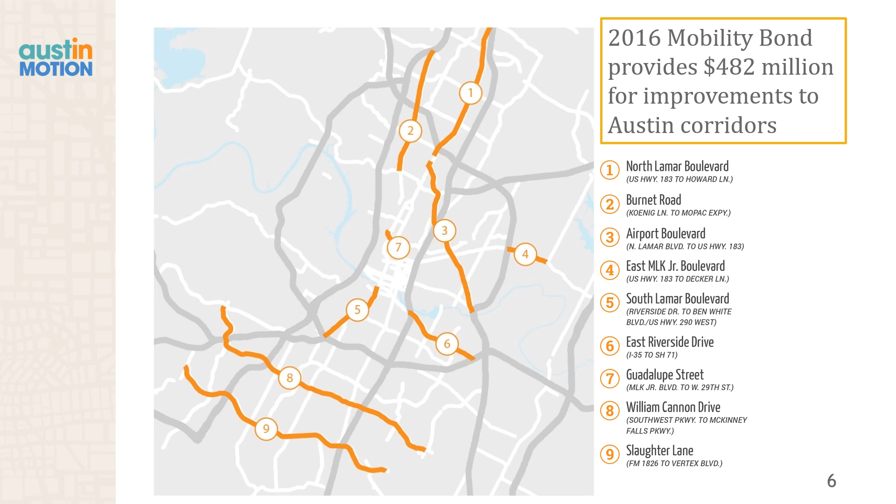To provide some background, in 2016, Austin voters passed the 2016 Mobility Bond, which provides $720 million for transportation improvements throughout the City of Austin. As part of the Corridor Mobility Program, $482 million of the bond funds are being used to design and construct multimodal improvements on 9 major roadways. South Lamar Boulevard between Riverside Drive and US 290 is one of the 9 major roadways identified in the Corridor Construction Program, which is funded through the 2016 Mobility Bond and is part of the Corridor Mobility Program.

The City of Austin completed a Corridor Mobility Plan for South Lamar Boulevard in April 2016. The plan outlines the recommendations for improving mobility and safety along the corridor. In addition, South Lamar Boulevard is a part of the recently approved Capital Metro Project Connect System Plan and the locally preferred alternative. The City of Austin conducted environmental studies to understand the potential impacts of the proposed improvements for the South Lamar Boulevard corridor.

These studies were conducted in accordance with the National Environmental Policy Act, or NEPA, as well as per state requirements outlined in Title 43, Part 1 of the Texas Administrative Code, or TAC. The South Lamar Boulevard corridor is owned by TxDOT. The City of Austin is pursuing environmental clearance for all the South Lamar Boulevard improvements between Riverside Drive and US 290 that are recommended in the Corridor Mobility Plan that was completed in April 2016.

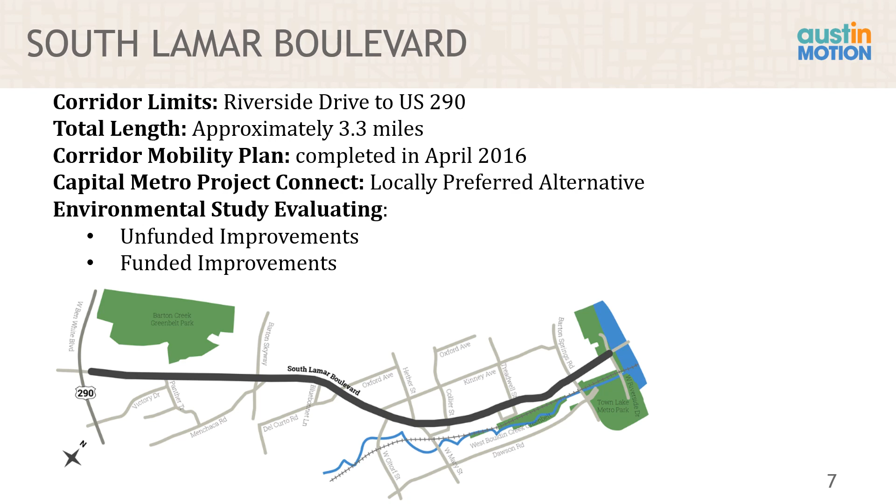This includes improvements that are not yet funded for construction, as well as those that have been funded by the 2016 Mobility Bond. Achieving environmental clearance for all improvements will enable the City of Austin to construct them when future funding sources are secured.

The goal of this project is to address safety and mobility concerns along the South Lamar Boulevard corridor. Over 40,000 vehicles travel this corridor each day. According to crash data collected by Austin Transportation, 2,173 crashes occurred on the South Lamar Boulevard corridor between 2015 and 2020. Those crashes resulted in 21 serious injuries, 283 non-incapacitating injuries, and 321 possible injuries. 53 of those crashes involved bicyclists and 46 involved pedestrians.

There are currently no bicycle facilities between Barton Springs Road and Riverside Drive. Bicycle facilities are on-street and unprotected on both sides of South Lamar from Barton Springs Road to US 290. The pedestrian facilities need reconstruction in several locations. Sidewalks either need repairs, are not connected, or do not meet ADA guidelines. In certain locations, sidewalks are inaccessible due to missing ramps, and in other locations, utility poles conflict with the sidewalk path. In many areas throughout the corridor, driveways are undefined or very wide, contributing to numerous points of potential conflict between vehicles and cyclists and pedestrians.

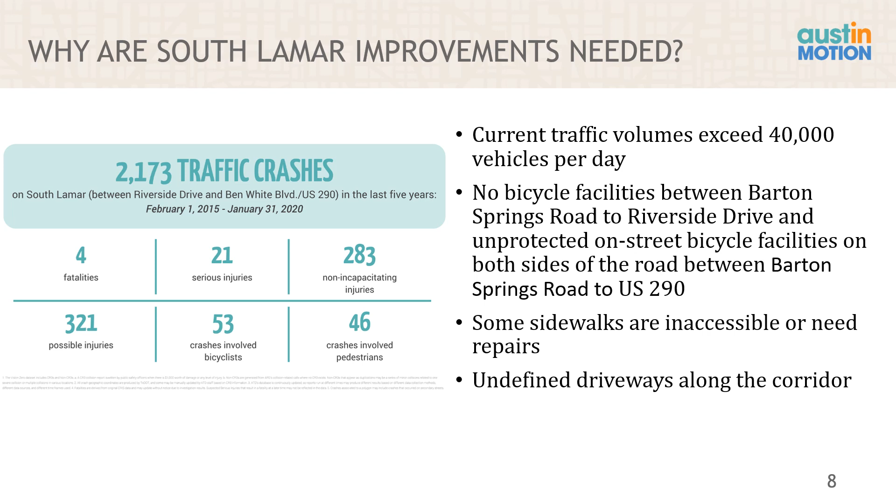This is a typical section for the existing configuration of South Lamar between Riverside Drive and Barton Springs Road. This segment currently consists of 6 travel lanes, 3 northbound and 3 southbound, separated by a raised median with openings for left turn movements.

There are existing sidewalks but no bicycle lanes. Other infrastructure includes an underground stormwater drainage system.

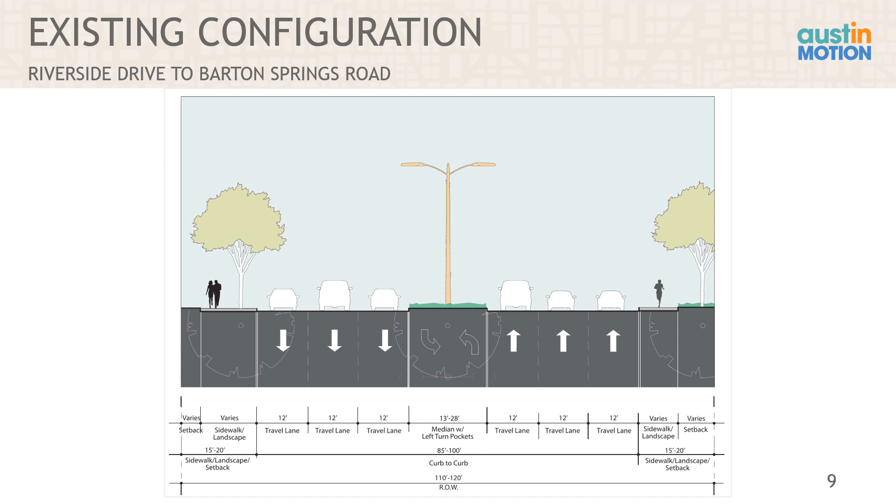The funded improvements between Riverside Drive and Barton Springs Road represent the City of Austin's ultimate vision for urban corridors. Improvements include upgraded traffic signals at Riverside Drive, Toomey Road, and Barton Springs Road, pavement rehabilitation, and relocation of the

existing curbs towards the center of the road by removing the existing right turn lanes, two-way bicycle lanes, and continuous ADA-compliant sidewalks behind the curb on both sides of South Lamar Boulevard, access management improvements such as driveway modifications and

reconstruction of the center medians, drainage improvements, bus stop improvements in partnership with Capital Metro, and enhanced landscaping with a variety of plantings and tree species, street lighting, and streetscape improvements such as benches, bicycle racks, scooter parking, and waste receptacles.

Though it varies by section, the existing right-of-way width from Riverside Drive to Barton Springs Road is generally 120 feet and will not require additional right-of-way.

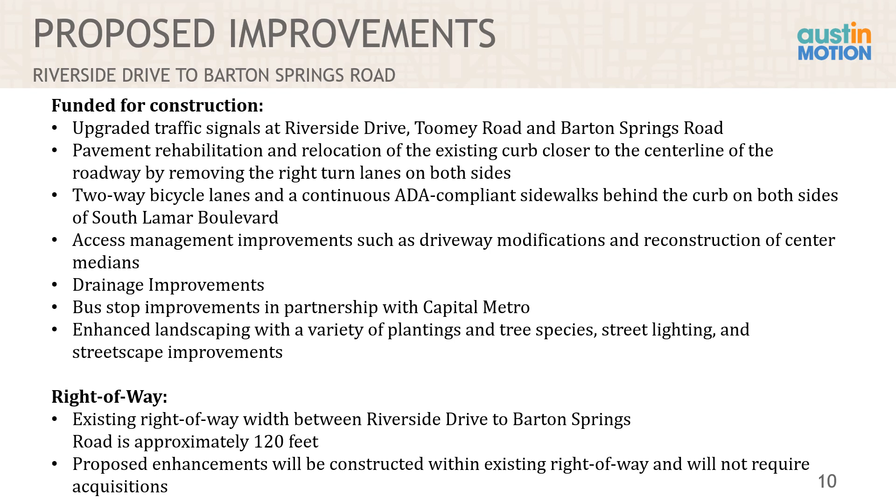This slide shows the proposed typical cross-section for South Lamar Boulevard between Riverside Drive and Barton Springs Road. These improvements reflect the ultimate vision for the South Lamar corridor and are funded for construction. The project will be constructed within the existing right-of-way.

Starting from the outside moving in, there will be 7-foot sidewalks where possible, 10-foot two-way bicycle lanes, and 7-foot landscape areas on both sides of the road. The landscape areas will separate cyclists and pedestrians from the travel lanes.

These elements will be accommodated within the existing right-of-way by repurposing the existing right turn lanes on both sides of South Lamar Boulevard.

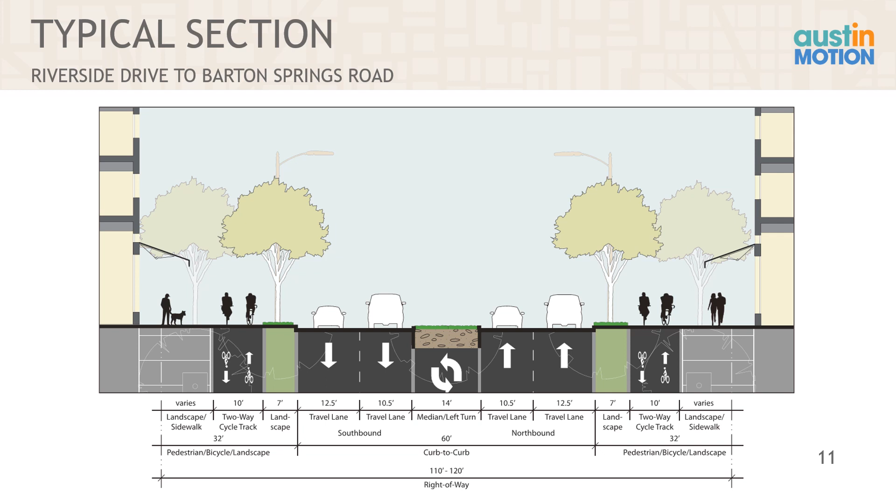Next is the typical section for the existing configuration between Barton Springs Road and US 290. This segment of South Lamar currently consists of 4 lanes, 2 northbound and 2 southbound, separated by a 2-way center running left turn lane.

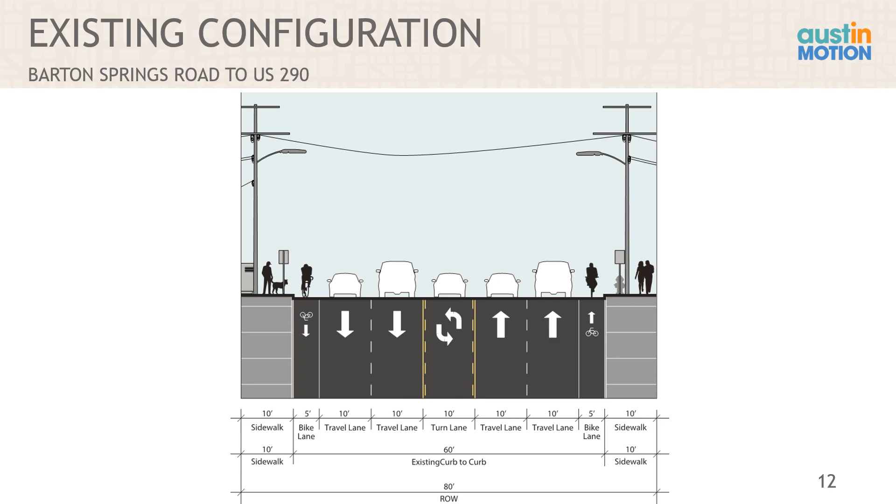Existing on-street bicycle lanes are on both sides of the road, as well as sidewalks. The existing drainage is generally an open ditch system south of Barton Skyway, and a closed stormwater drainage system north of Barton Skyway. There are also overhead utilities and poles that run along both sides of the road.

The funded South Lamar Boulevard improvements between Barton Springs Road and US 290 include improved traffic signals at existing signalized intersections with enhanced technology, 2 new traffic signals at Del Curto Road and Evergreen Avenue, 4 new pedestrian hybrid beacons, which are mid-block signalized crosswalks for pedestrians.

Safety and multimodal connectivity improvements at certain intersections, pavement rehabilitation and the relocation of existing curbs towards the center of the road, new shared use paths for pedestrians and cyclists on both sides of South Lamar.

Shared use paths will comply with ADA guidelines. Access management improvements such as intermittent raised medians along the corridor and driveway modifications.

Drainage improvements and bus stop improvements in partnership with Capital Metro, including a new dedicated transit priority lane northbound through the intersection at Barton Skyway and Menchaca Road.

The right-of-way width between Barton Springs Road and US 290 along South Lamar Boulevard varies by section, but is generally between 80 and 100 feet. The majority of the proposed improvements will be constructed within the existing right-of-way.

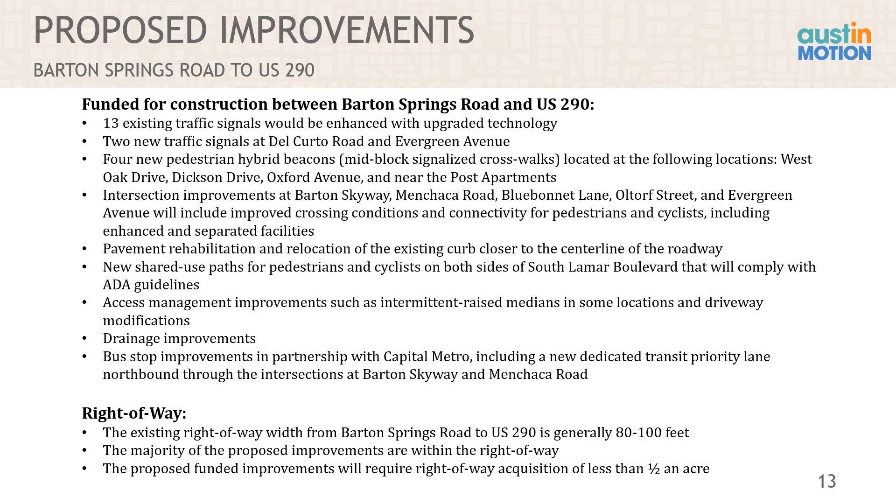The proposed funded improvements will require additional right-of-way of less than half an acre. These acquisitions are being analyzed during the design phase of the project.

This slide shows the proposed typical cross-section for South Lamar Boulevard between Barton Springs Road and US 290. These improvements are funded for construction. The project would largely be constructed within the existing right-of-way, starting from the outside moving in with 8-foot shared use paths

with 2 to 4 foot landscape buffer zones, separating cyclists and pedestrians from the travel lanes, would be on both sides of the road. It should be noted that the near-term funded improvements would require limited right-of-way, with needs generally restricted to areas at major intersections where turn lane modifications are proposed.

Relocation of the existing curbs closer to the center line of the road will accommodate the shared use paths and landscape buffers. The north and southbound travel lanes would remain, with intermittent median islands added along the corridor to define where the left turn should occur.

Landscape and streetscape will be added to the median islands.

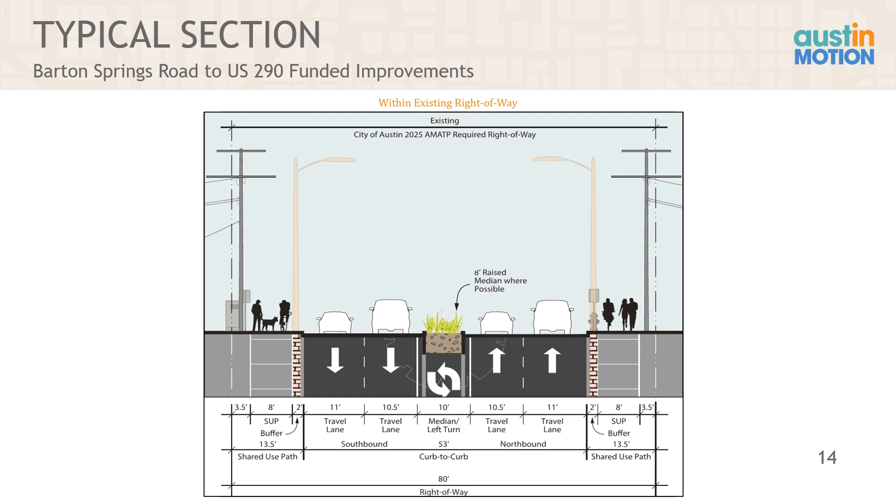In some places, elements from the unfunded vision are being implemented through private redevelopments. These include things like separate bike and pedestrian facilities and landscaping.

This slide shows the proposed typical cross-section for South Lamar Boulevard between Barton Springs Road and US 290, where elements from the unfunded vision are being implemented in some areas. Generally, this is possible where sufficient right-of-way is available at some intersections or through private redevelopments. Where possible, the City of Austin will construct improvements such as separate bike and pedestrian facilities and landscaping. The project would largely be constructed within the existing right-of-way.

Starting from the outside moving in on both sides of the road, there will be 6.5 to 10.5-foot sidewalks, 5 to 7-foot landscape area, 8-foot bicycle paths, and up to 2-foot buffer zones separating cyclists and pedestrians from the travel lanes.

Relocation of the existing curbs closer to the center line of the road will accommodate the pedestrian and bicycle facilities. The north and southbound travel lanes would remain, with intermittent medians added along the corridor to define where left turns should occur. Whether landscaping will be added to the medians will be determined prior to construction.

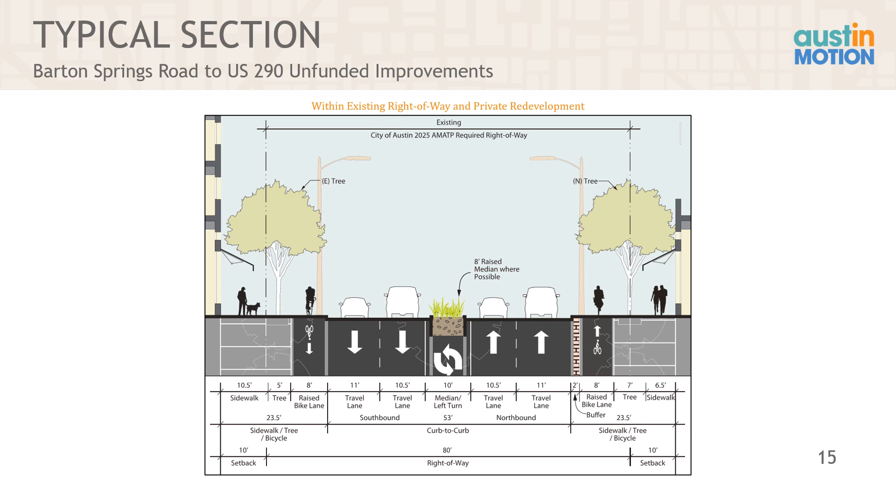The City of Austin evaluated the environmental impacts of improvements to South Lamar Boulevard between Barton Springs Road and US 290 that are recommended in the Corridor Mobility Plan completed in April 2016. These improvements would reflect the city's ultimate vision for urban corridors. If funding were to become available, the City of Austin would make efforts to leverage the improvements that are currently funded for construction in the near term.

The shared use path will be repurposed as a dedicated bicycle path, and separate sidewalks will be constructed. Additional improvements such as streetscape, landscape with trees, and street lighting are also part of the unfunded improvements.

The existing right-of-way width between Barton Springs Road and US 290 varies by section and is generally between 80 to 100 feet. To achieve the ultimate corridor vision, the unfunded improvements will require approximately 100 to 120 feet and acquisition of approximately 5 acres. As mentioned in the previous slide, these elements are currently being implemented in some areas where sufficient right-of-way is available, at some intersections or through private redevelopments.

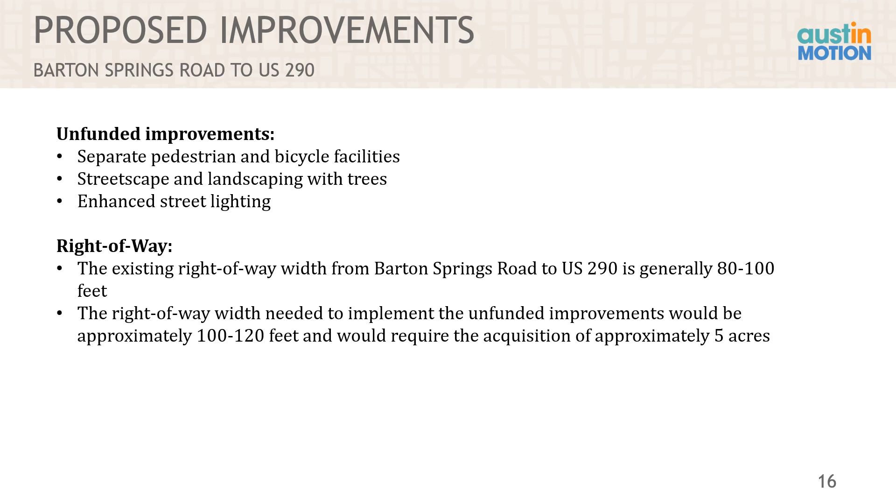Finally, we show the proposed typical section for the unfunded improvements to South Lamar Boulevard between Barton Springs Road and US 290. The project would require right-of-way acquisition to construct the unfunded improvements.

Starting from the outside moving in, on both sides of the road, there will be a 7-foot sidewalk, 2-foot buffer, 7-foot bicycle lane, and an 8-foot landscape area separating cyclists and pedestrians from the travel lanes. Additional enhancements include streetscape, landscaping with trees, and street lighting.

If funding were to become available, the City of Austin would make efforts to leverage the improvements that are funded for construction in the near term. For example, the shared use path will be repurposed as a dedicated bicycle path and separate sidewalks will be constructed.

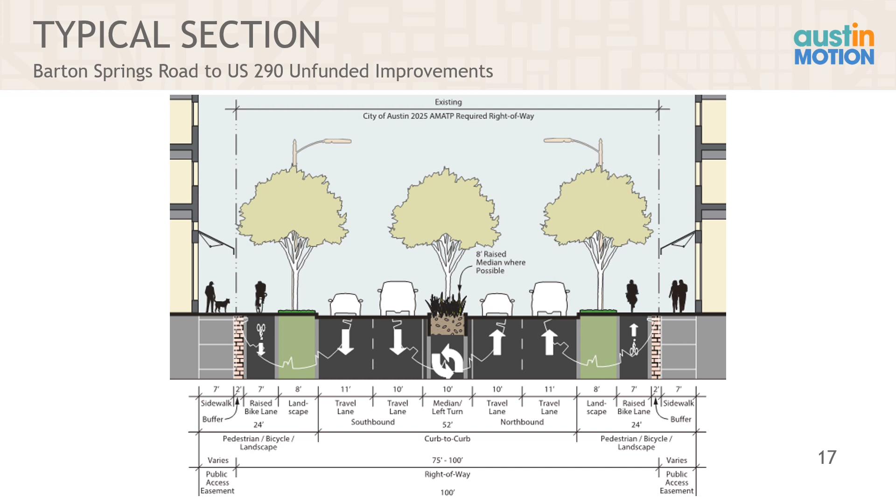I will now discuss the environmental studies completed for the proposed project. These studies considered the potential impacts of the unfunded improvements. Technical reports for each of these studies are available online for public review.

As part of the project's compliance with the National Environmental Policy Act, the City of Austin considered biological resources, community impacts, water resources, as well as archaeological and historical resources. Overall impacts to environmental resources as a result of the South Lamar corridor improvements would be minimal.

Air quality and hazardous material studies were also conducted, but were not found to have impacts within the corridor and will not be addressed in this presentation. The City of Austin worked to minimize environmental impacts based on the findings of these studies.

First, I will discuss the biological resource study. There is no suitable habitat for state or federal listed threatened or endangered species within or adjacent to the project area. Suitable habitat for 6 species of greatest conservation need exists within the project area.

Best management practices, BMPs, will be implemented for the 6 species to minimize biological impacts: amphibian and water quality BMPs for the Woodhouse toad, terrestrial reptile BMPs for the common garter snake and Texas garter snake, and vegetation BMPs for the tree dodder, low spurge, and Correll's false dragonhead.

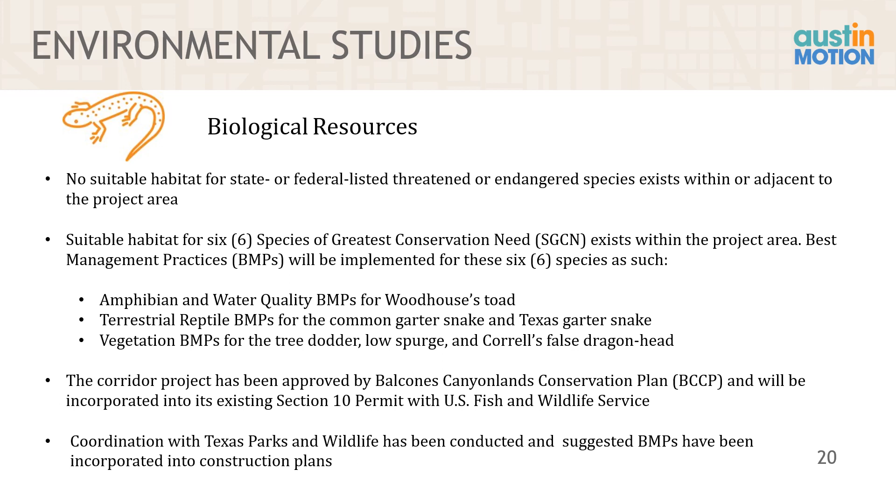The corridor project has been approved by the Balcones Canyonlands Conservation Plan and will be incorporated into its existing Section 10 permit with U.S. Fish and Wildlife Service. Early coordination with Texas Parks and Wildlife has been conducted, and suggested BMPs have been incorporated into the construction plans.

Next, I will discuss community impacts. Minor access changes would result from the addition of raised medians and modified driveway access. No displacements are anticipated as a result of the proposed project.

Limited English proficiency populations were identified within the project area. Limited English proficiency persons were given and will continue to be given the opportunity for meaningful involvement in the NEPA process for the proposed project.

Although minority populations are present throughout the project area, the proposed project would not have a disproportionately high and adverse impact on minority populations because the proposed raised medians would not further divide or separate any communities.

The design elements in the proposed improvements include pedestrian hybrid beacons and curb ramps. Other proposed design elements integrated into the raised medians are pedestrian refuge and curb ramps along the corridor and upgraded signalization at intersections with accessible push buttons. Overall, the proposed design features will enhance mobility, access, and reduce congestion and improve safety for both minority and non-minority census geographies.

Next, I will discuss water resources. The project area does not cross any major Austin creeks or tributaries. There is one potential water of the U.S. located within the project limits. It is anticipated that any impacts to the waters of the U.S. would be authorized through Nationwide Permit 14 for linear transportation projects.

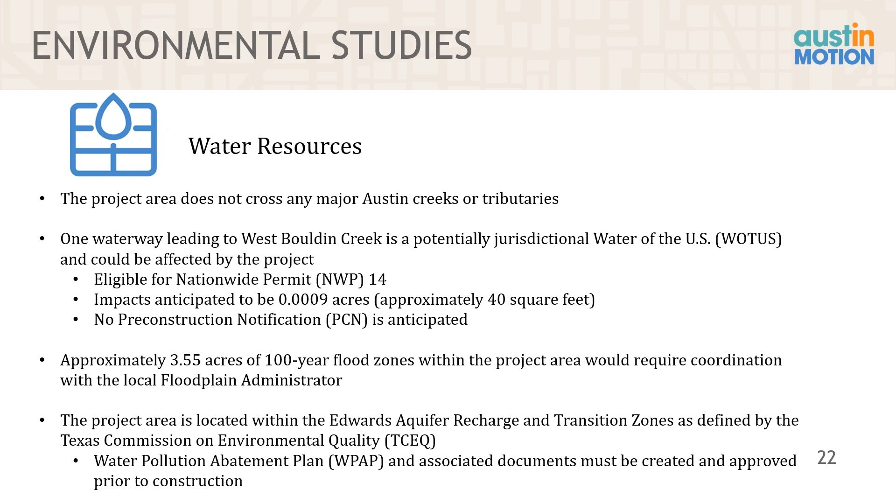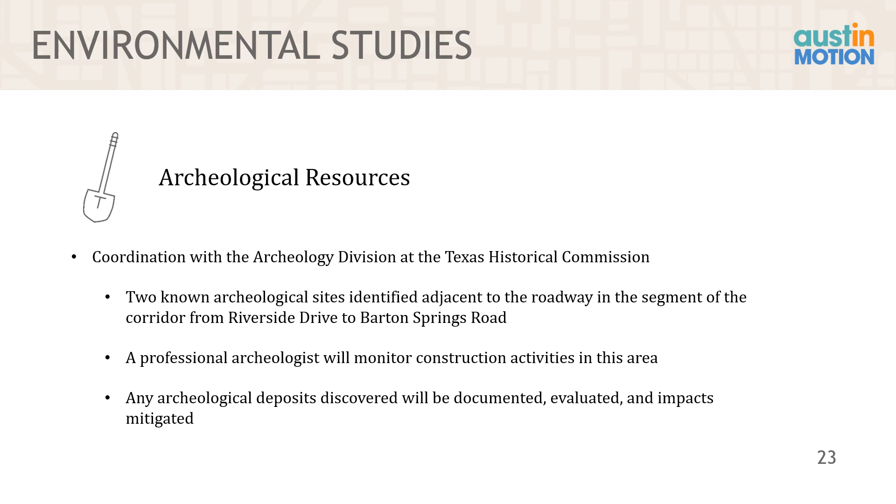Next, I will address archaeological resources. Coordination with the Archaeology Division at the Texas Historical Commission has been conducted. There are 2 known archaeological sites identified adjacent to South Lamar between Riverside Drive and Barton Springs Road. A professional archaeologist will monitor construction activities in this area and any archaeological deposits discovered will be documented, evaluated, and impacts will be mitigated.

And finally, I will discuss historical resources. A review of existing historical records was conducted and 5 historic structures were identified along the corridor. 3 structures are listed on the National Register of Historic Places. They are located outside the right-of-way and it is not anticipated that they would be directly impacted.

2 structures are designated as registered Texas historical landmarks and would not be directly impacted by the project. If the project receives federal funds or if a federal permit is required, then the Texas Historical Commission will be consulted to evaluate impacts to these structures in accordance with federal law.

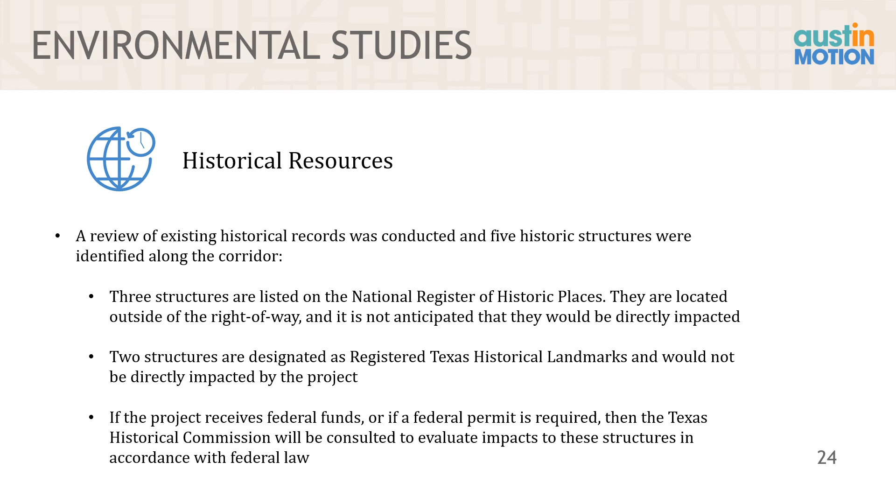And now I will discuss the project schedule for the South Lamar Boulevard corridor. We anticipate the entire South Lamar corridor project will receive environmental clearance by fall 2020.

For the South Lamar Boulevard segment between Riverside Drive to Barton Springs Road, the final design is underway on the funded improvements and is expected to be completed by summer 2020. The project is expected to start construction beginning winter 2020.

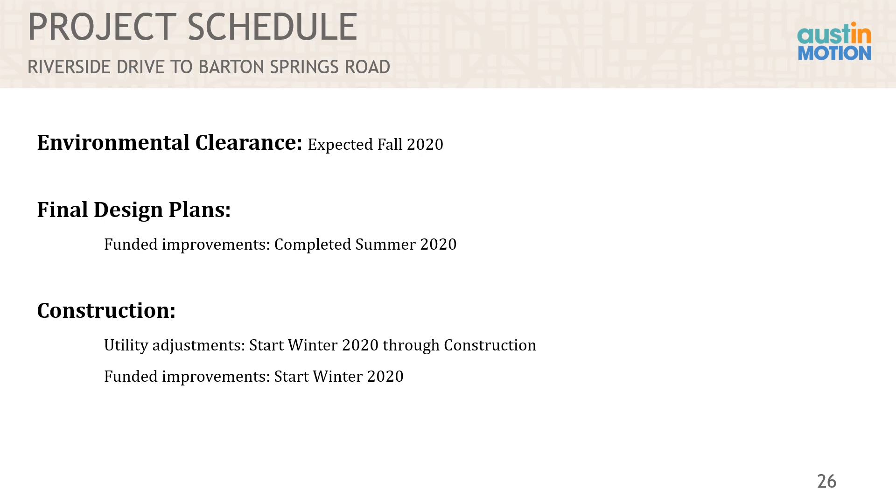For the South Lamar Boulevard segment between Barton Springs Road to US 290, final design is underway on the funded improvements and is expected to be completed by fall 2021. The project is expected to start construction beginning fall 2022. The final design plans and construction start dates for the unfunded improvements are to be determined and are dependent upon funding availability.

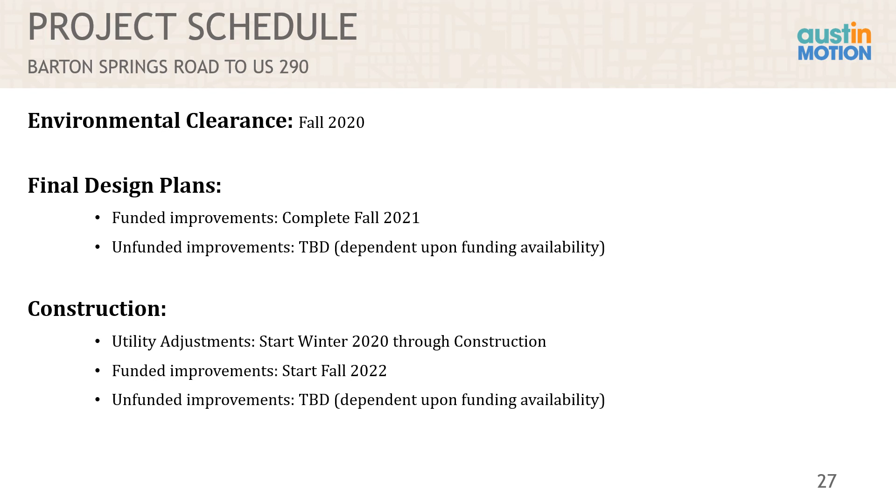This concludes the presentation for the South Lamar Boulevard virtual public hearing. We want to hear from you, so please take the time to provide your input during the public comment period.